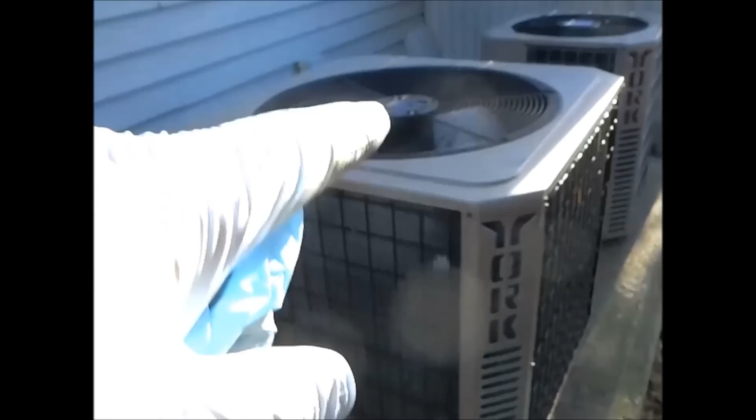But I'll try to put a video together for you guys, even with the shots that have black on the sides. It's not on widescreen, in other words. You got widescreen and you got regular screen. If you ever see a video with black on both sides, it's because it's not on widescreen. For some reason the camera is not recording in widescreen.

I went in there and played with all the settings, still nothing. I played with it for like 2 hours last night. Oh well, that one's going in the trash. But anyway, I'll try to get some footage today and put a video together.

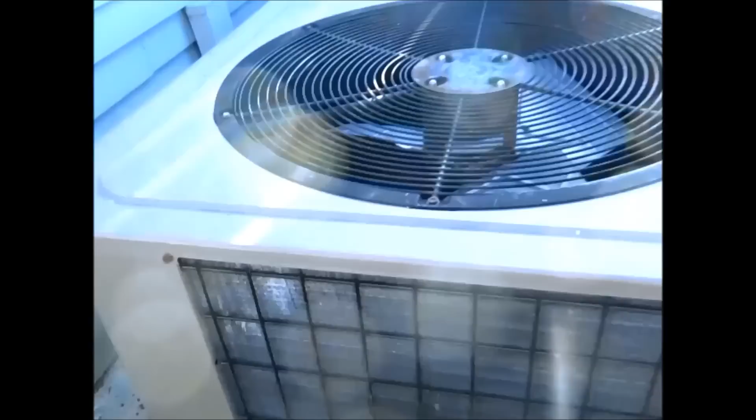The 4-ton pump that's coming out - I'm going to put a new line set in, and put the new one up on pump up. It's got a nice slab here. It's 25 years old and it's completely out of gas, so I'm going to put a whole new system in for the lady, instead of me trying to chase a leak. It's old anyway.

Get this thing cut away and we'll start working on cutting that one in the basement apart. Oh, it looks like this one's got a dead mouse.

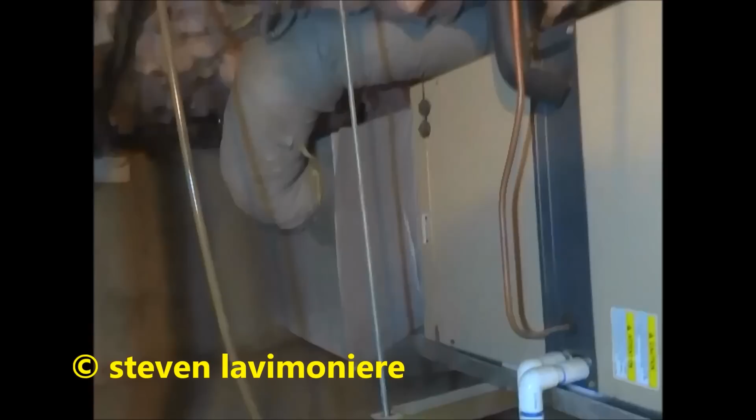Alright guys, I got the condenser all cut away, the heat pump. I'm going to run a new line set. Got all the electrical out of the way for now. When the truck driver comes, I'll probably throw this on his truck, and we'll put the new one up on pump-ups on that pad.

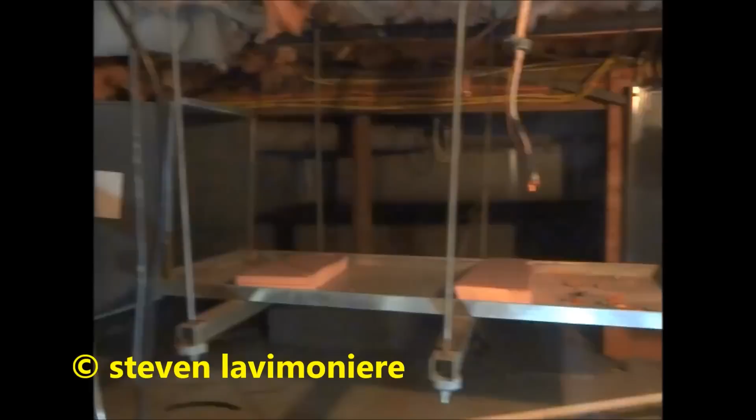Down here in the basement, it's a crawl space. I got myself a little creeper here. There's a panel right there I can shut the power off at, so it'll be pretty straightforward.

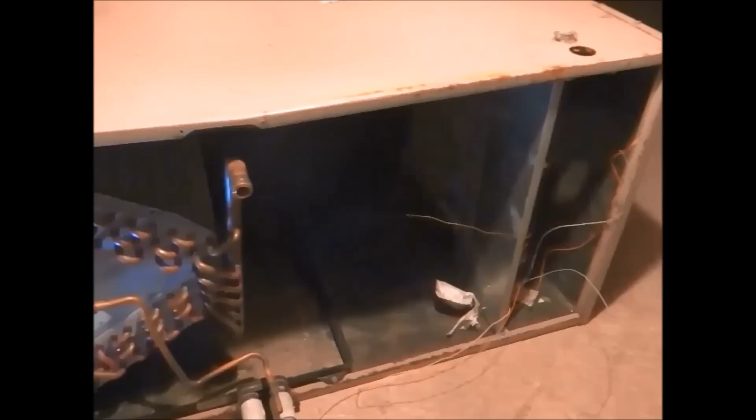I'll probably use this pan - don't really need the pan because it's right down on the crawl. I'll put a new pump in there and we'll do what we gotta do here.

Alright guys, I got a little 10 kW heater in here. That's what I'm going back with, the other one. I got the power off there, so I should be able to disconnect all these wires.

I pulled the fan out, got the fan over there. I gotta just drag all the stuff out of here now.

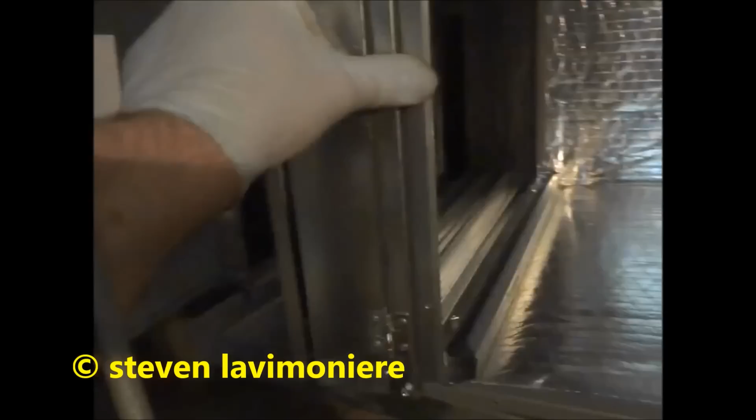Steve is working again. Oh yeah, Steve's a real working man, mama. He's next level.

Alright guys, this unit came with rails in the back here. I had to install these other 2 rails here so I could flip the coil.

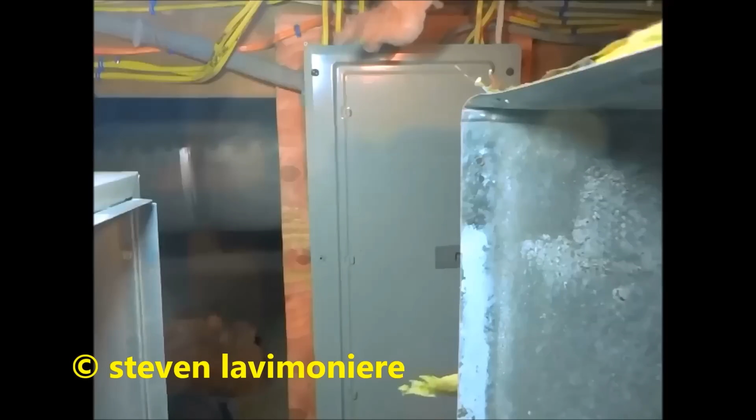I put this little filter rack in on the edge here, screwed it all in on the inside, so when I put this coil in, it's all fastened. I'll just have to fasten this to this, which is not a big deal. I gotta get the coil in first.

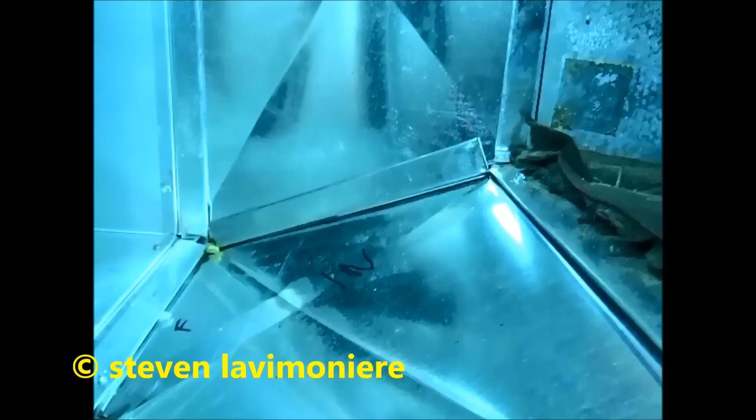So these rails come with the air handler in the package. You gotta put them in if you're gonna spin a coil.

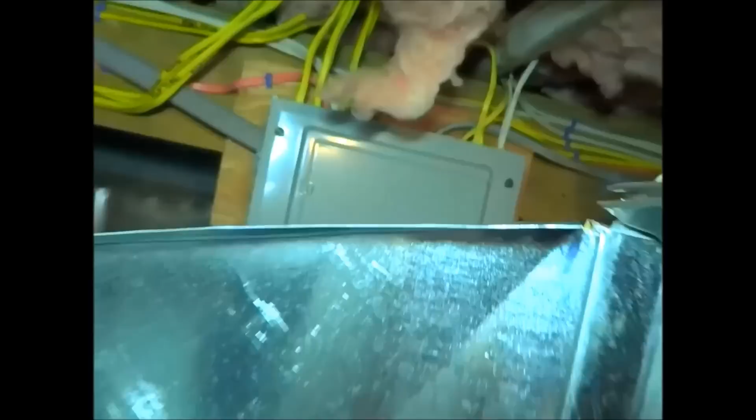The supply transition should be pretty interesting. It's probably like a 4-inch offset both ways.

Alright, and I'll put some S-lock on these pieces, and I'll build that transition, working my way right around.

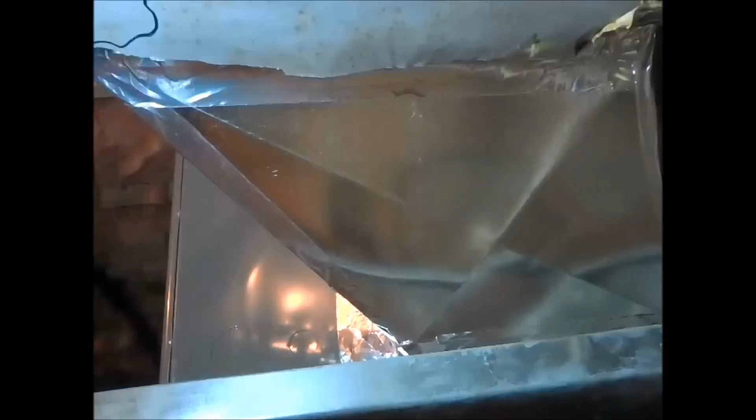Alright guys, I slid that piece in, and you can see I'm right where I need to be. I'm just going to put an S-lock on this top one, then build the top piece, and I'll do this one last.

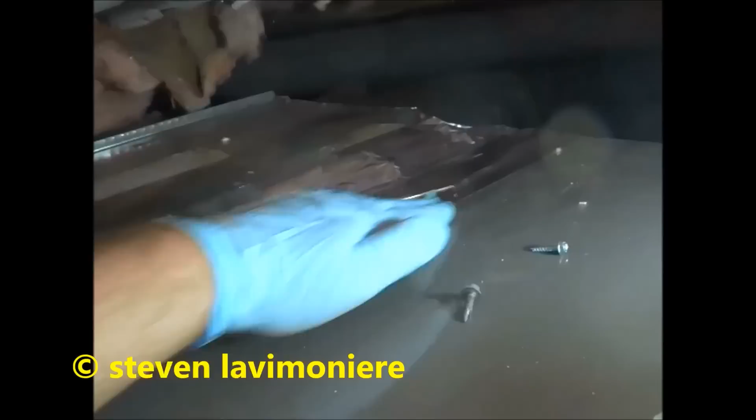Alright guys, I got that transition. Here, I'll get you some shots of what it looks like. You can see it offsets quite a bit, like a 4-inch. Oh, can you see it?

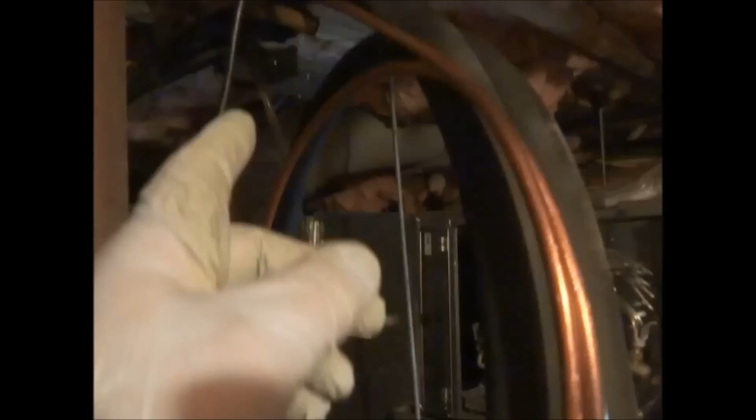I got the return all taped up also.

This was just a half inch difference, so I just folded it over and screwed it in. It's good enough on the top there.

I got the new line set ran over. I'm going to tie it in in the morning. I got to tie the condenser heat pump in the morning. I put my heat kit in. So I'm getting there the first day, get it all tied in.

The insulation on there. Return doesn't have any insulation.

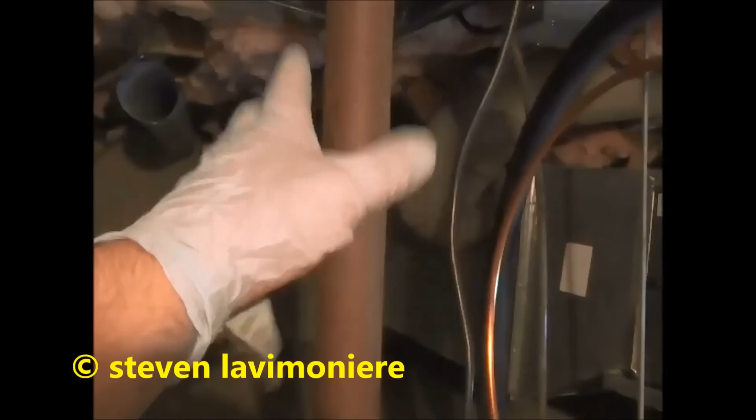I'll give you a shot at the heat pump before I go, but I'm going to probably use Stay Bright 8 on it. Look at that. I'm not sure if I might use Sil-Fos. I'm not sure yet, I'll make a decision in the morning.

I'm going to put the drier inside here instead of outside. I'm pretty happy with what I got done today. I got the old one out, I got the new one in. Got the return and supply tied in. I got my new line set ran. I could have used the old line set, but it's right outside the wall here, so not a big deal. I always like to run a new one if I can.

Doesn't hurt. I'll give you a shot at the heat pump.

My little car crawler I brought with me.

We got a little furry friend there. Looks like he's been sleeping for a while. Oh yeah, yes.

I don't mind working in a crawl space like this. It's all concrete, it's not dirt. Not bad.

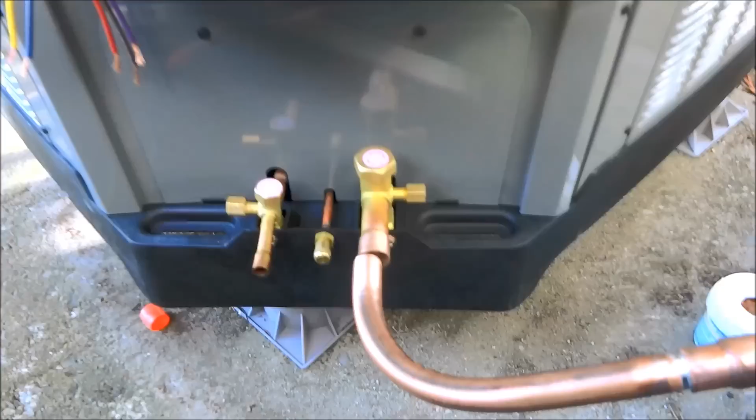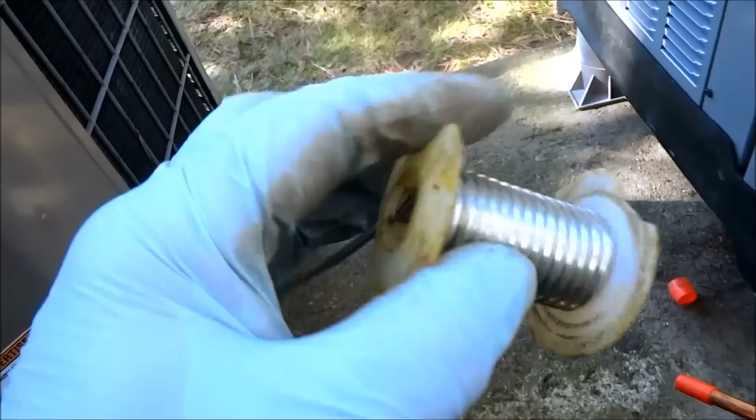I got a couple of heaters. I got one here, it's not gonna get that cold tonight, but just in case. I got another heater right here. I've been running them all day to make sure that they're safe, so I feel confident leaving them overnight. Even if it caught on fire, this is quartz, wouldn't be an issue. I put that one on a piece of sheet metal.

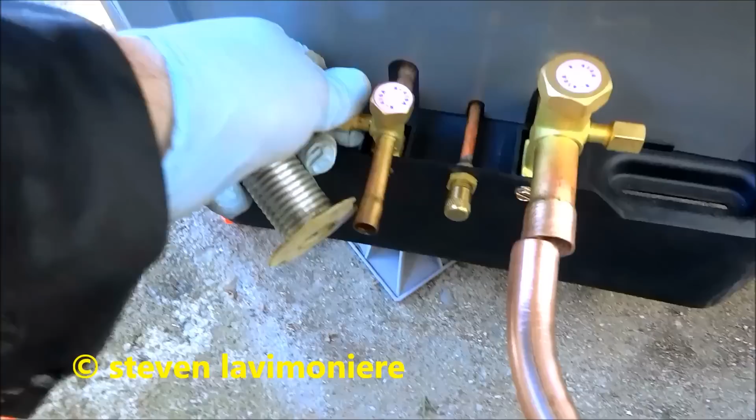Alright guys, I'm doing my solder, Stay Bright 8, that's the stuff I have here. He sent me a 7/8 line set, so the connections are 3/4, but I ain't got a problem with just doing it this way.

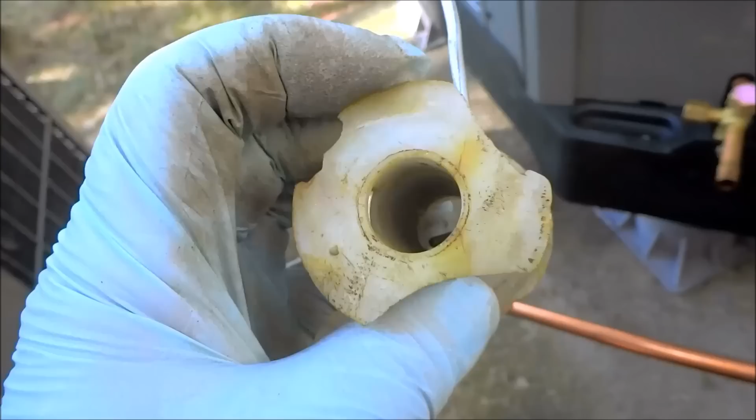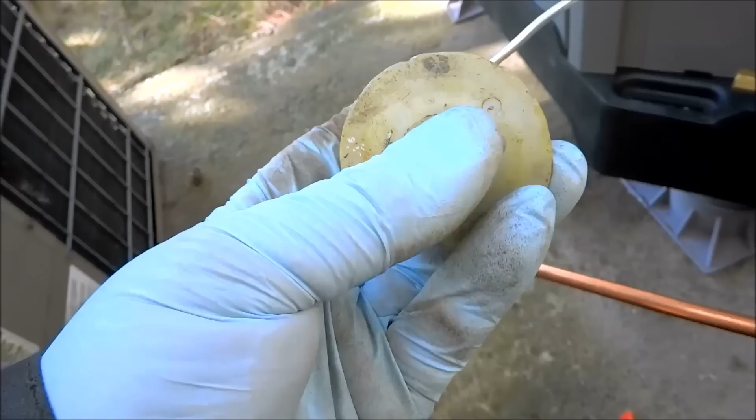I'm sliding my insulation over, and I'll do this joint last here. I got my wet rag, I got my rag stuff right there. Wet rags are good. Take the cores out.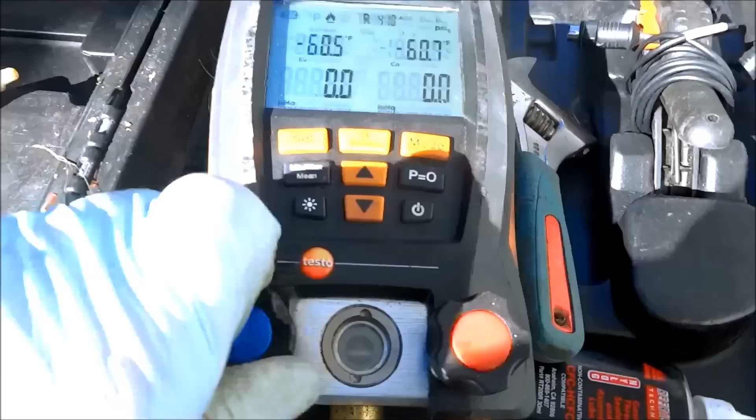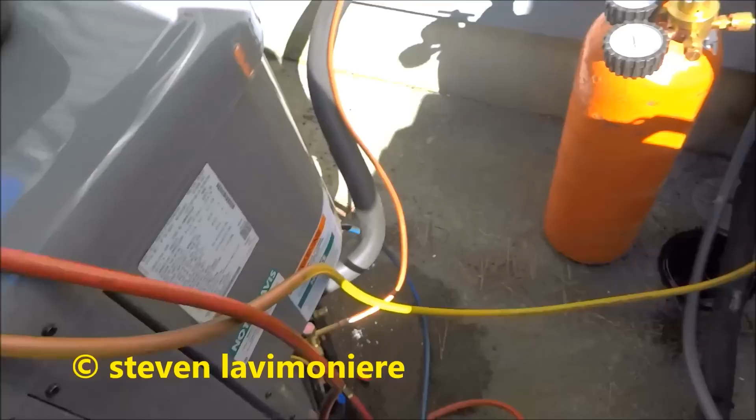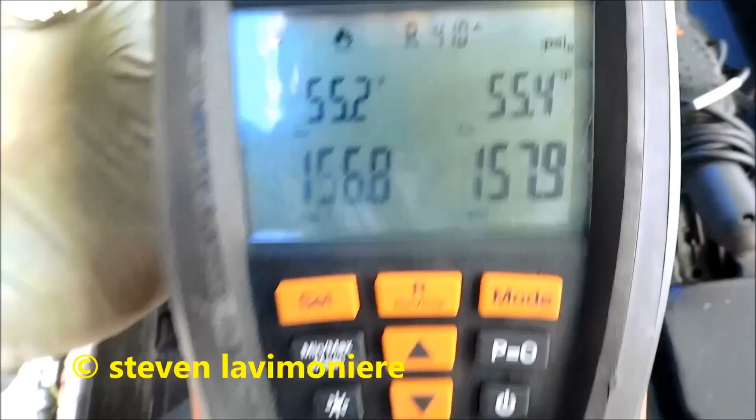The Stay-Brite 8's pretty good stuff, and it's actually better tensile strength than the Sil-Fos. Some guys don't like it, but I got no issue using it on a case like this, crawl space. It's actually rated pretty good, Stay-Brite 8 is what it's called. This has been in my refrigeration bucket for a long time. It's got more silver in it than the regular solder, higher silver count.

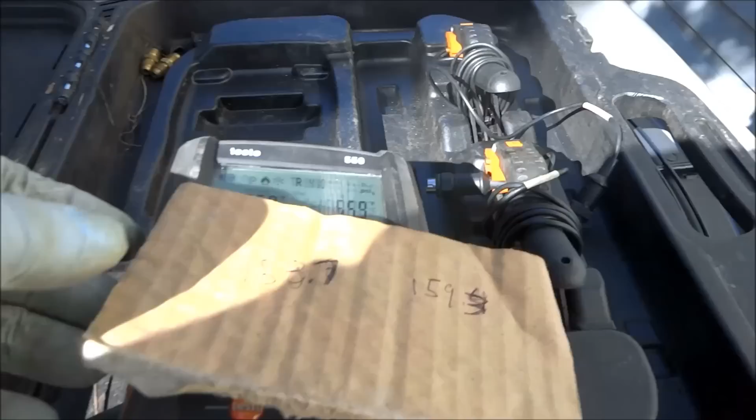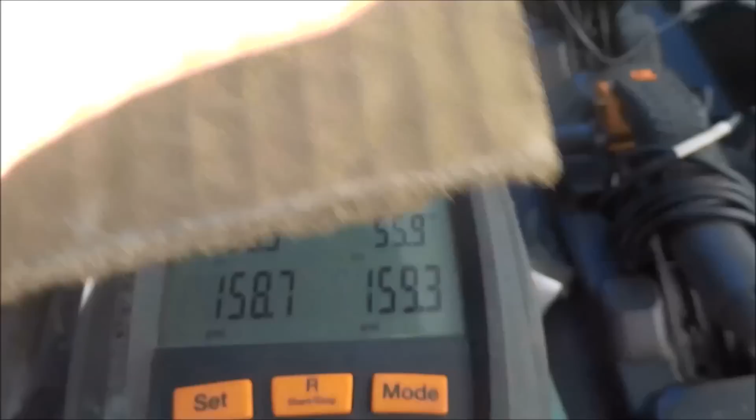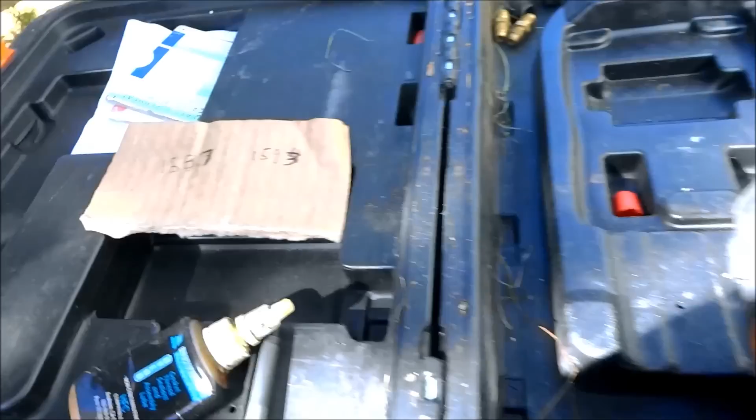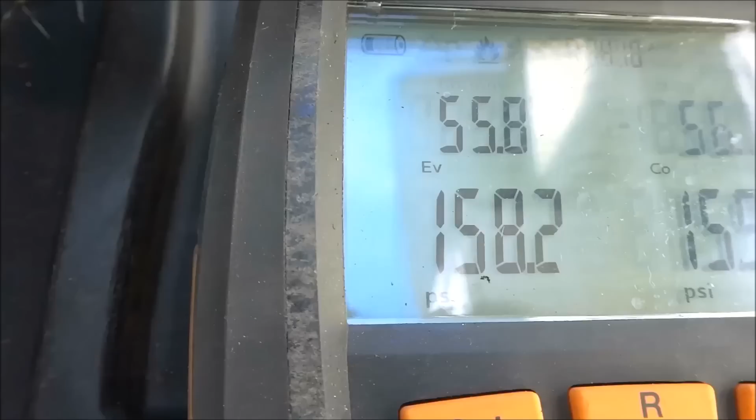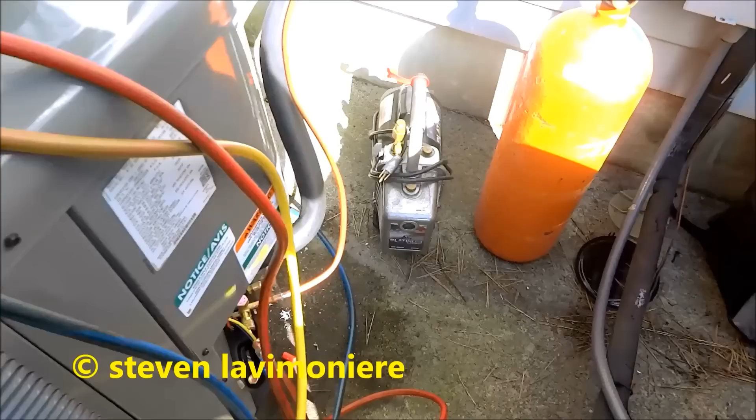Put the air in, you gotta let it settle down a little bit. I got it off right there. In the meantime, I'll get my vacuum set up, ready, start pulling a vacuum. Alright guys, it's been sitting for about 5 minutes.

You can see this number here went up because of the TXV, and this number came down a little bit, but I'm good with that. I'm still 158 here, and I'm still 159. It actually went up on the other side, so I'm good with that.

I got my vacuum pump here, we'll get chooching on the vacuum. We'll see if we get it down to 500 micron. Shouldn't be an issue.

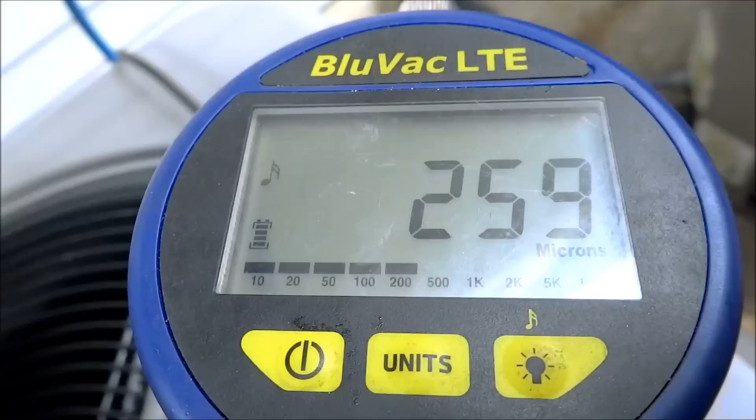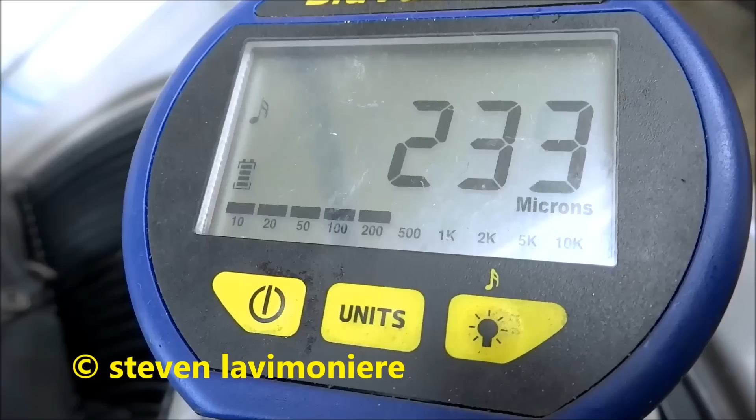I got my 45s on there, right to my 3/8 hoses. So after I'm done with the vacuum, I can shut the 45s off and then release the gas, freon into the system.

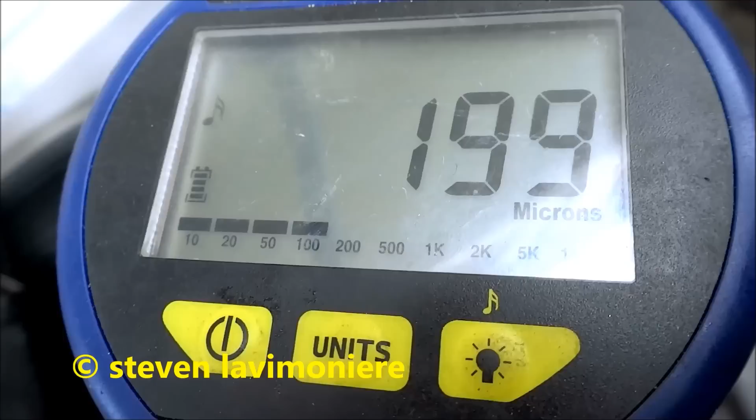We'll let it pull down. It's gonna take a while to pull it down. We'll let it run for a little bit, but I'm good with that.

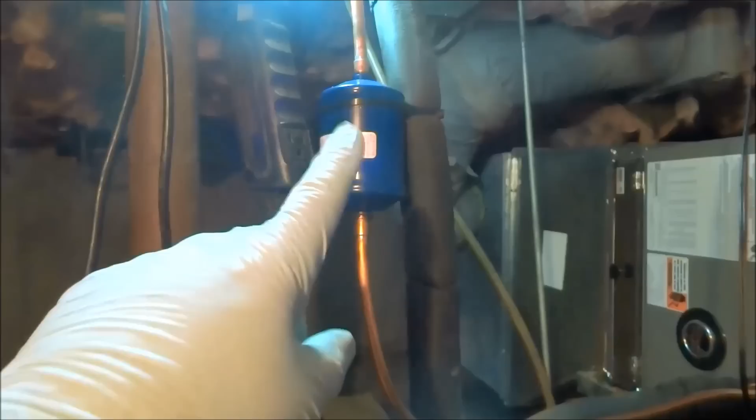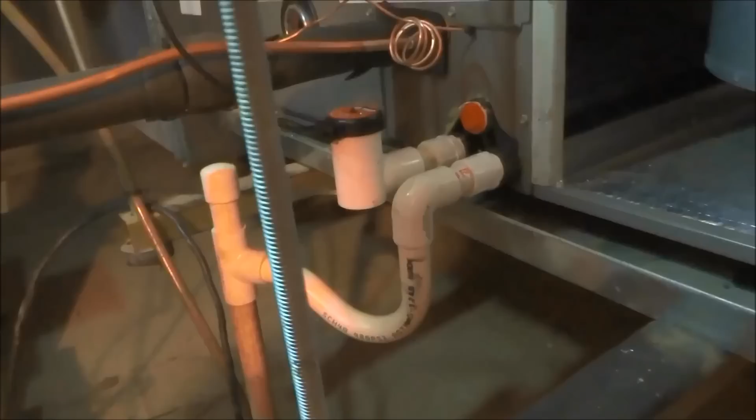I did use Nylog on all the hoses, makes a big difference using a Nylog. Put a little bit of that snot on there as you put the hoses together, and it works great. I think I'm good there with the micron, so.

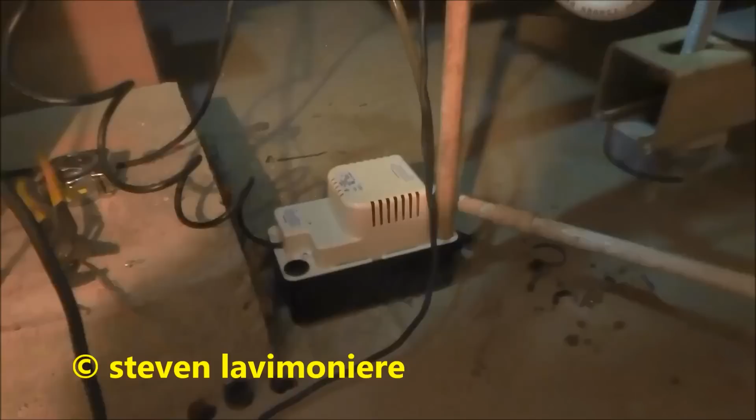Alright guys, I got the refrigerant lines all ran. I got my drier on the inside here, that's the one that come with the unit. My sensor bulb for the TXV at 10 o'clock - you put it at, I got it at 2, I'm sorry, 2, 10, or 12, they say. Got it all strapped in.

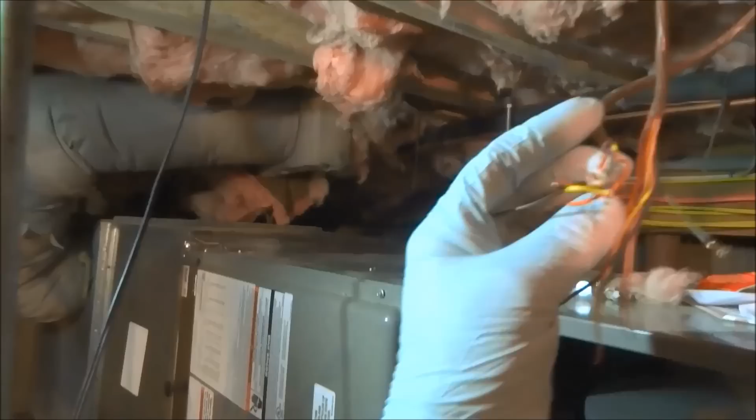I got an EZ Trap here, came down with a P-trap, put a new condensate pump in. I left the line that was there, that's dumping outside - it's strictly for summertime use for the condensate, and there's another line coming down that dumps in the condensate line also.

I'm still waiting, the electrician should be showing up pretty soon to wire everything. So I got the heat kit in yesterday.

So I got the filter rack in there. I'm gonna leave some extra filters, I got 6 extra. I'll put them up on this ledge here in that box so they won't get wet down here. That's it.

Looks like we got an 8-wire going outside and an 8-wire going to the thermostat, so we should have plenty of wires there. Looks like a 7-wire, odd. It's a 7.

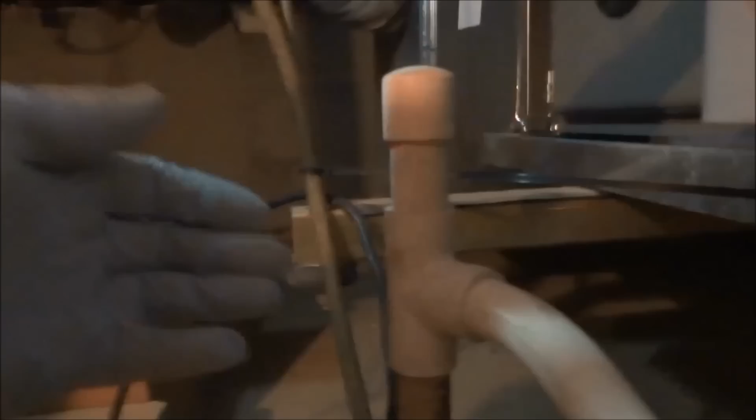Well, that's all I need. Wire this baby up - we already pulled a vacuum on it and released the charge, and we'll check it. We'll get it close, and I'll have to come back in the spring to check it on cooling mode, but it's too cold to be checking it in cooling mode now.

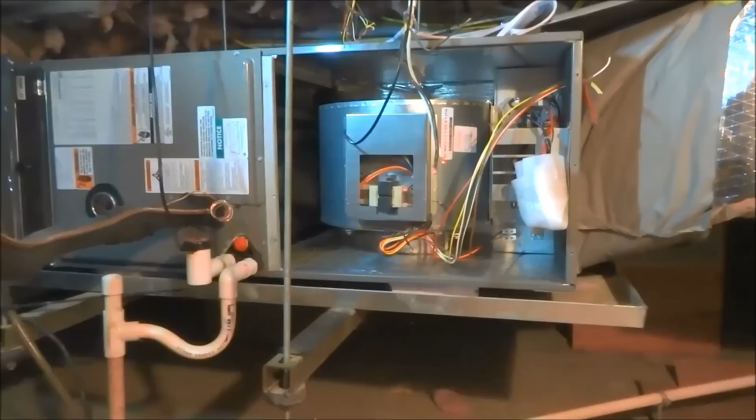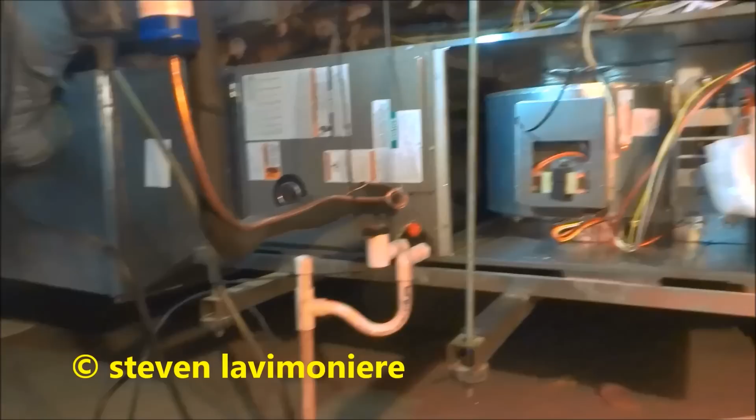Alright, this cap right here is loose if I want to take it off. Left enough room if I ever have to make a cut. Same thing with that other one there, EZ Trap. I used Teflon tape on this, white Teflon. Should be good.

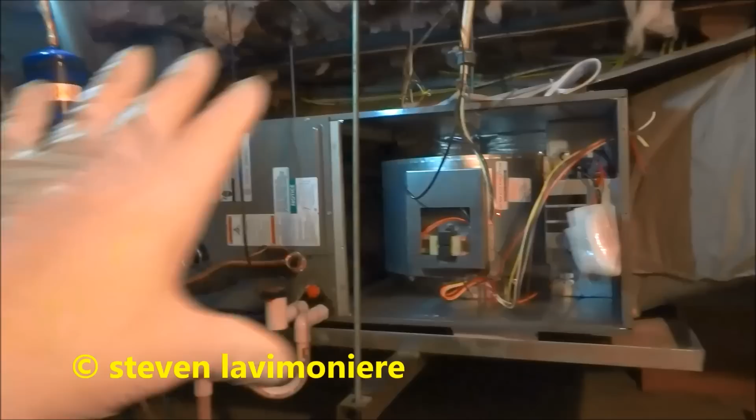Just kind of picking up the stuff down here. I should be ready to rock and roll pretty soon.

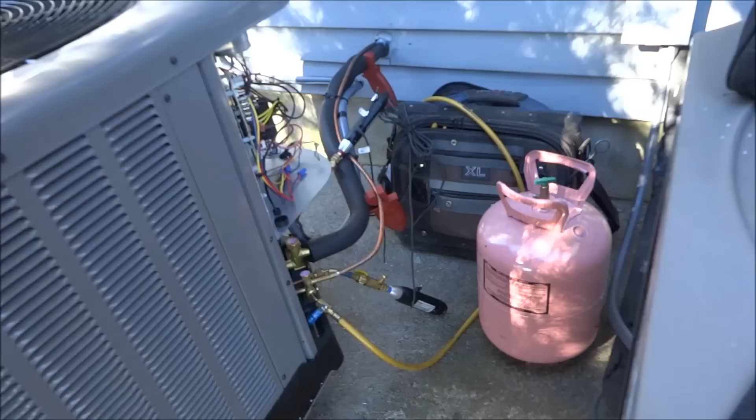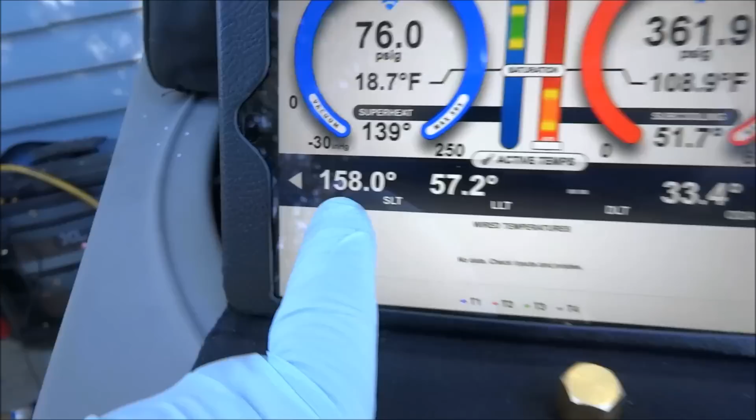Like I said, all my other footage from yesterday is on standard frame, not on wide frame. I don't know what happened with that other camera. It's not working out. I'll probably give you a couple shots here and there of that stuff, but it's not really worth posting because it's not wide enough, looks funky. I'll post a couple shots just to give you guys something to see, but the old unit was here, same position basically.

I ran a new line set. Should be ready to rock and roll here in a little bit.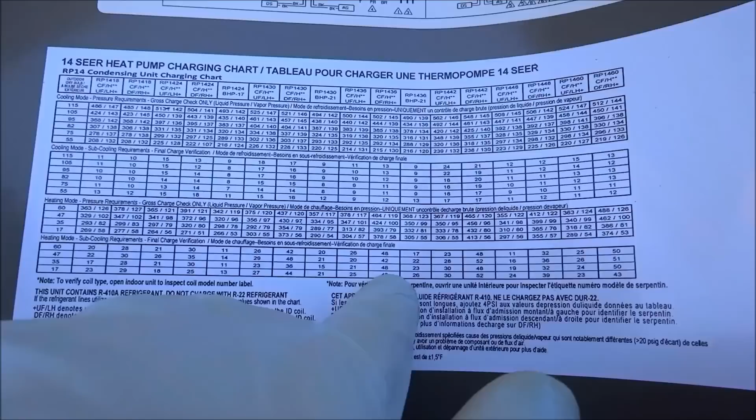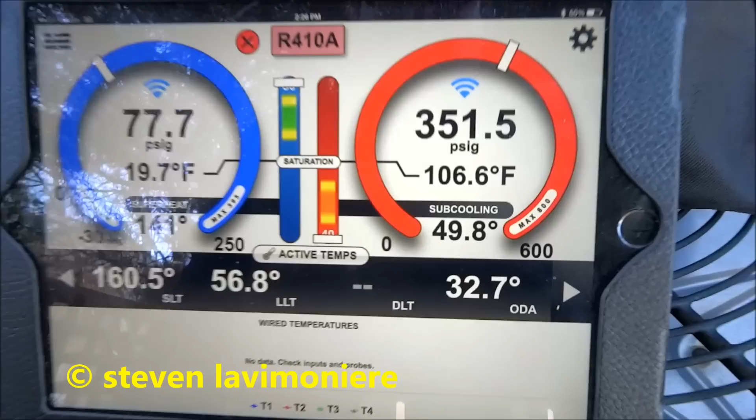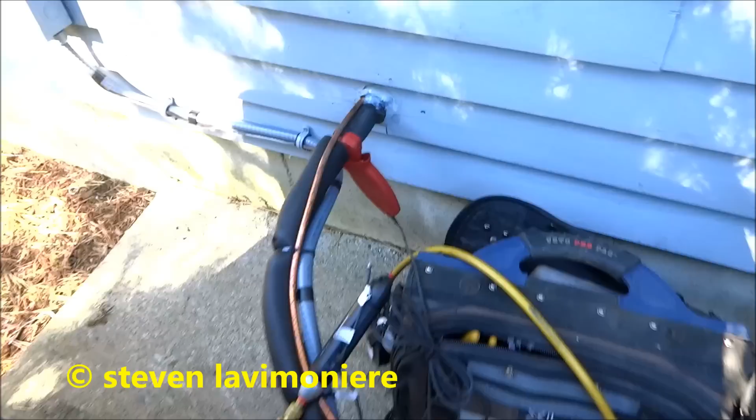Alright guys, basically what I got here is my outdoor temperature is like 32, and I'm going in probably just below 160. According to this chart here, for the size unit I should be working on - this is the scale right here - it says about subcool 48 is what I'm looking for.

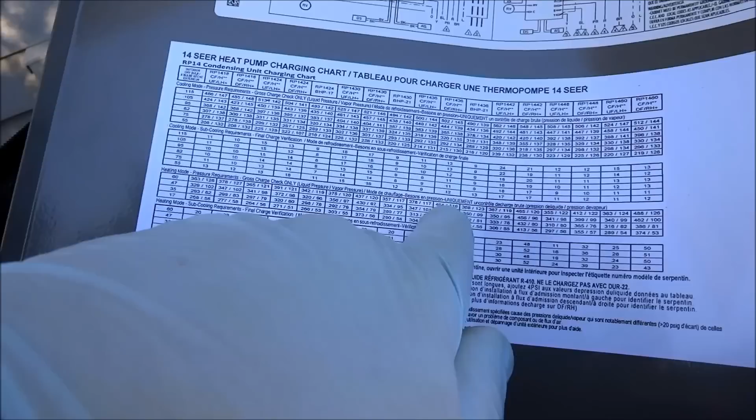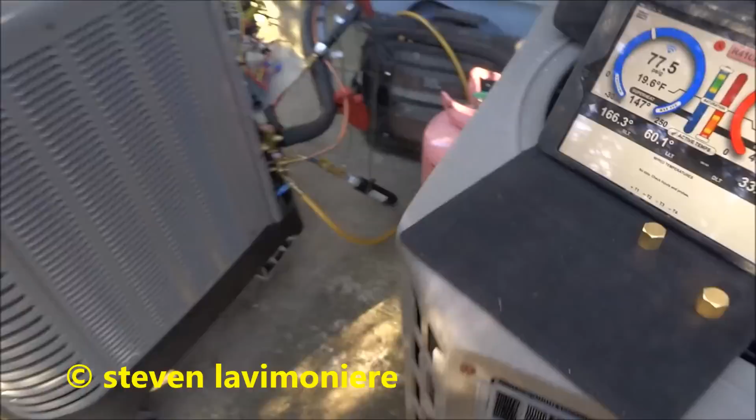According to that, so there's my subcool right there, 48. I'm gonna have to come back and check this thing come summertime, but I'm pretty good with that. And I got my subcool happening right here coming back. I got some of the doors open inside, trying to get it to run for a while, you know.

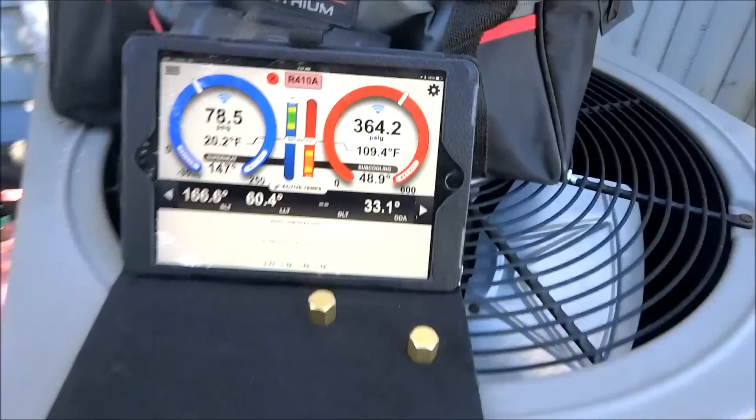It says 78, 364. Like I said, I gotta come back in the summertime and double check. Charging the heat pump in the winter isn't always as easy as everybody thinks it is. According to this chart, I'm pretty close.

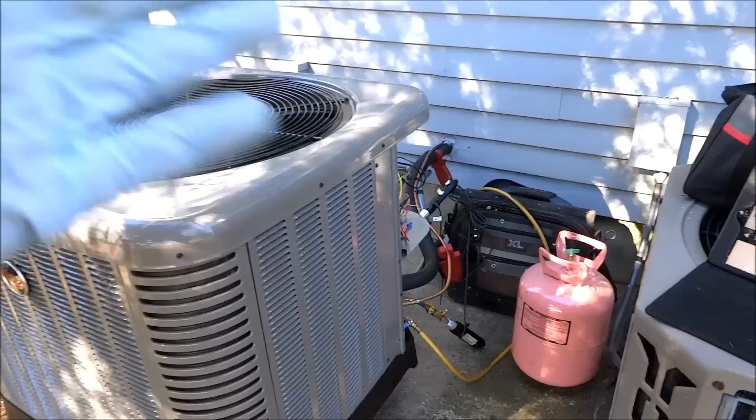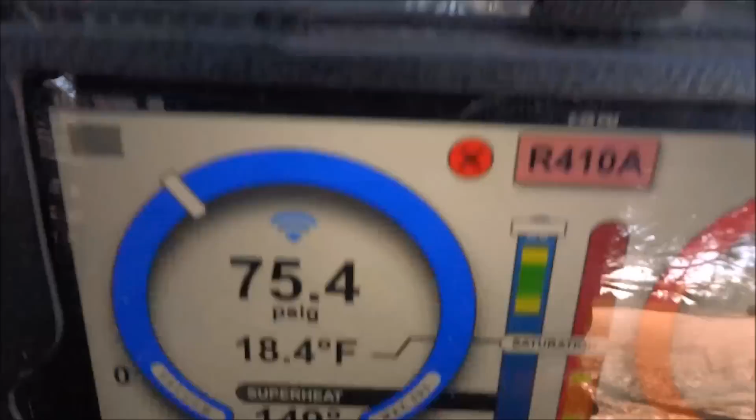There was a pre-charge from the factory, 25-foot line set. I added a little bit of gas because I jumped up from 3/4 to 7/8 line. So it's pretty damn close right there. Subcool's 48 - that's what it calls for right there, 48 at 35 degrees, and I'm at 33, so should be pretty damn close.

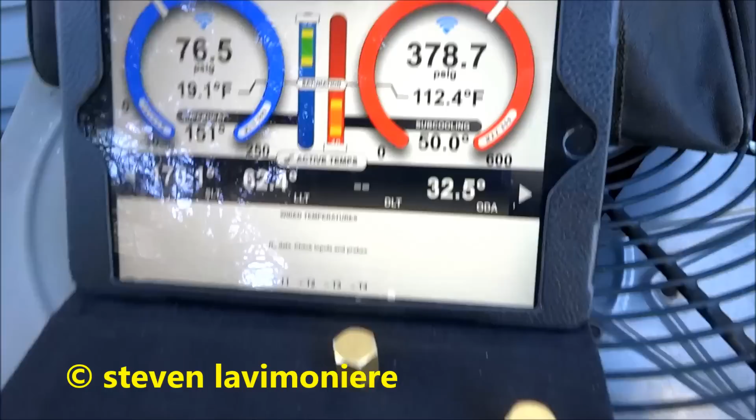Like I said, I'll come back come summertime on a hot day and check the charge - that's the best way of doing it. Even my head pressure's coming up a little bit the longer it runs, but I'm close to the 390, 79.

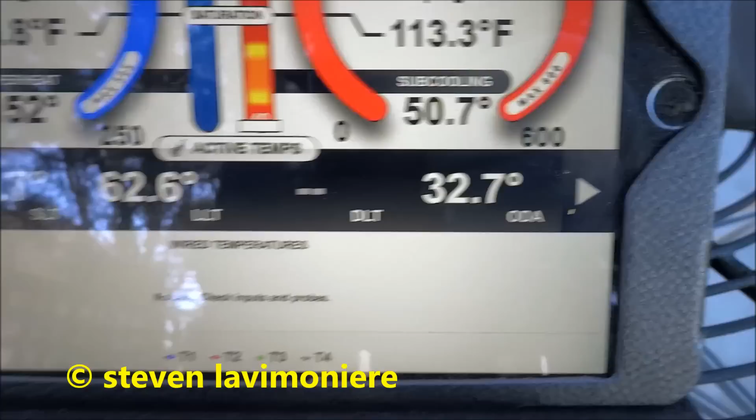Calls for 48 degree subcool and I'm at 50, so I'm good with that. We'll button this up and get you a couple shots, but man, it got cold all of a sudden here.

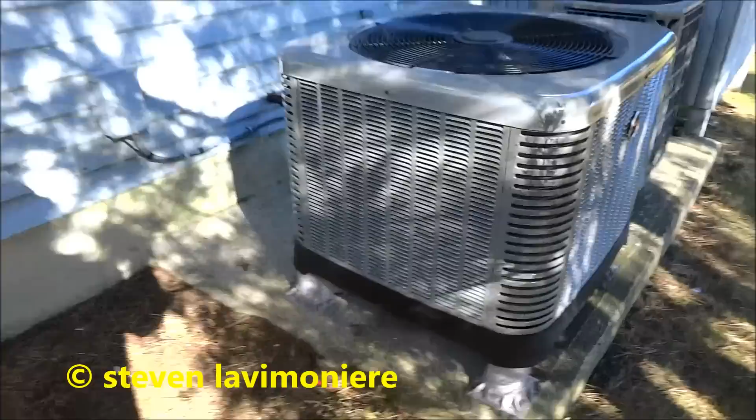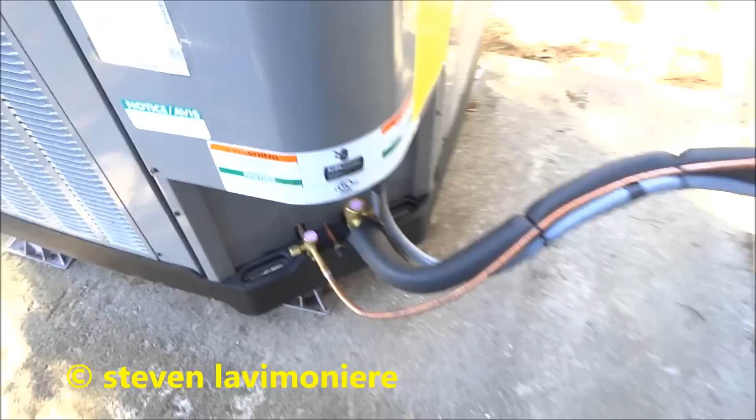I'm going in about 170 inside, so that's a 140 degree split right there, between the outside temperature and going in like 170. Basically, they tell you it should be like 110 plus the outside temperature, but things vary, you know. I'm good with the 140, good with them numbers.

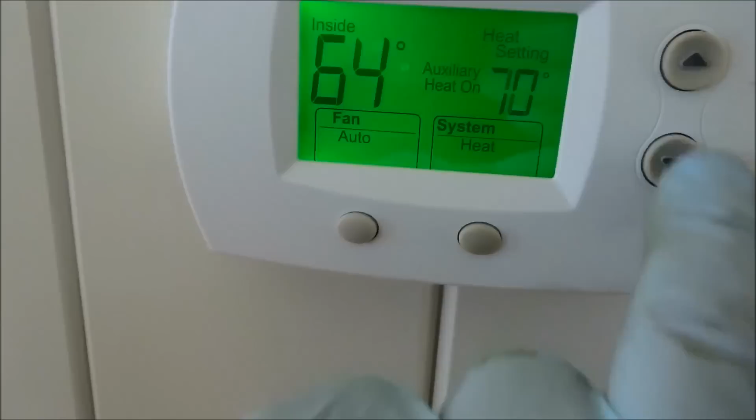Got it all sealed up good. Working good.